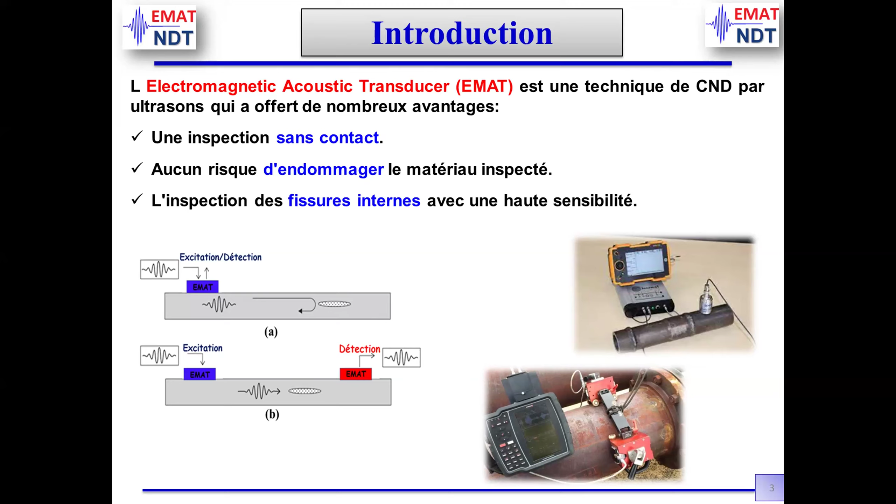The latest research on EMAT sensors focuses on detection and improving the efficiency of the sensor, but the quantification of defect size remains an issue that must be solved, and that is what we try to solve in this research by solving the inverse problem.

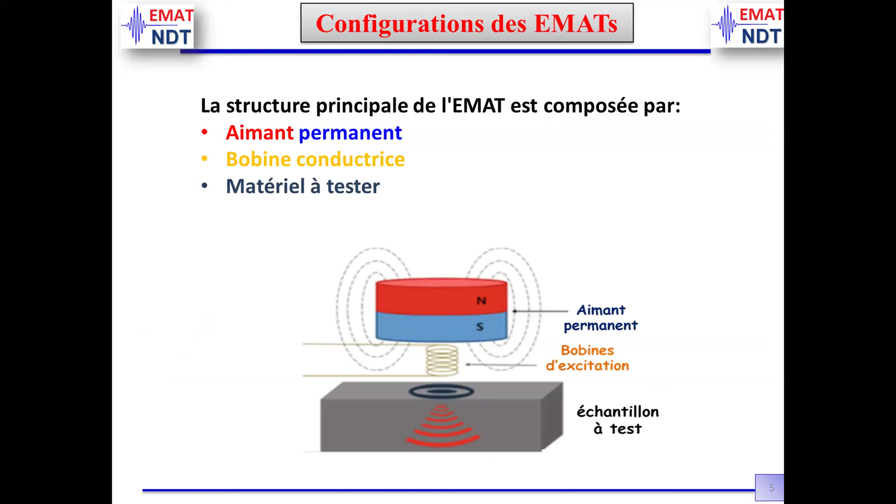For the sensor, the main configuration is composed of permanent magnets and a conductive coil placed above the material under test. The principle is the generation of the Lorentz force inside the conductive material. This force results from the interaction of the static magnetic field and the induced current at the surface of the material. This force introduces vibration, which means ultrasonic waves propagate in the material. We can receive and pick up these waves by the inverse of the electromagnetic model.

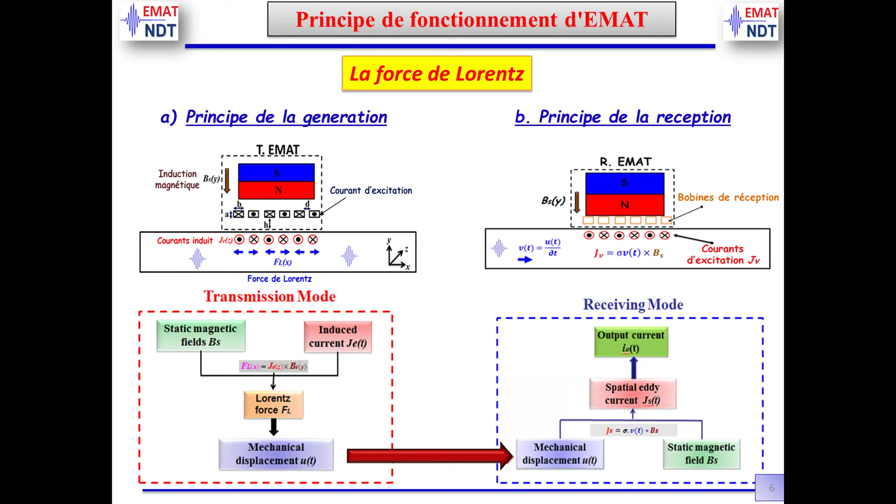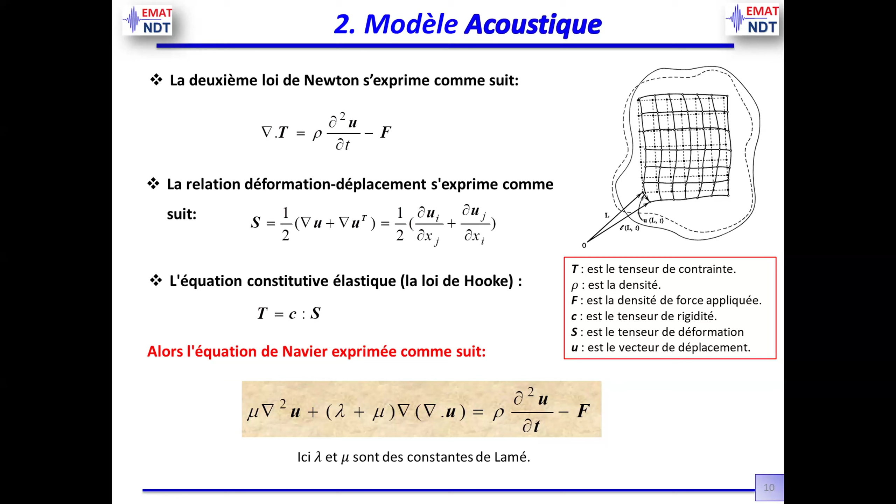The mathematical formulation is obtained from Maxwell's equations and the constitutive laws of the medium to form the partial differential equation, which is solved by the finite element method. For the acoustic model, we use Newton's laws and the relation between deformation and displacement to formulate the Navier equation, which is expressed by the following equation.

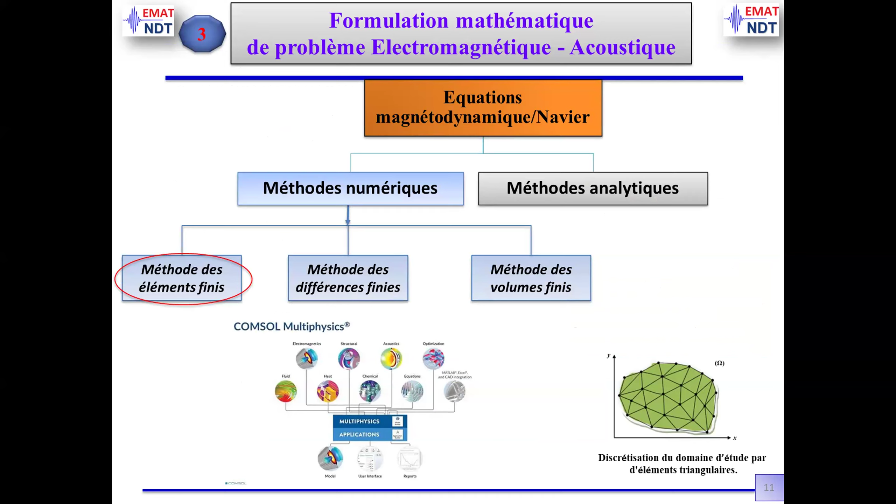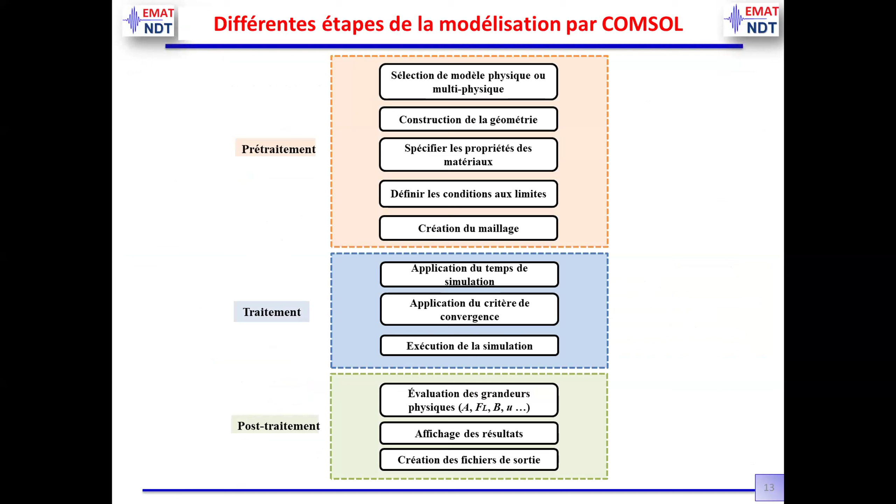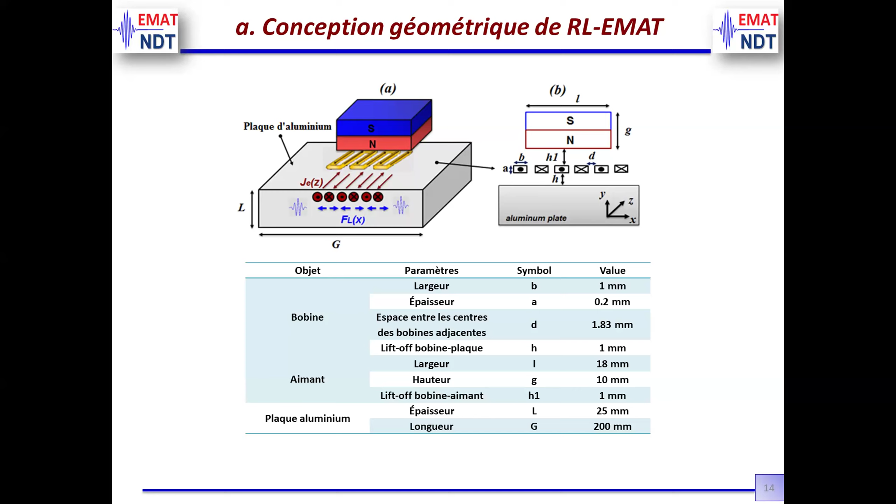To solve the preceding equations, we use the finite element method implemented in COMSOL Multiphysics. After the introduction of the geometry and the physical properties, we solved the problem to evaluate the potential vector and the ultrasonic field. This is the configuration that we used and implemented in COMSOL. It is the same for the transmitter and the receiver. We evaluate the following physical parameters: magnetic field and eddy current, Lorentz force, and mechanical displacement.

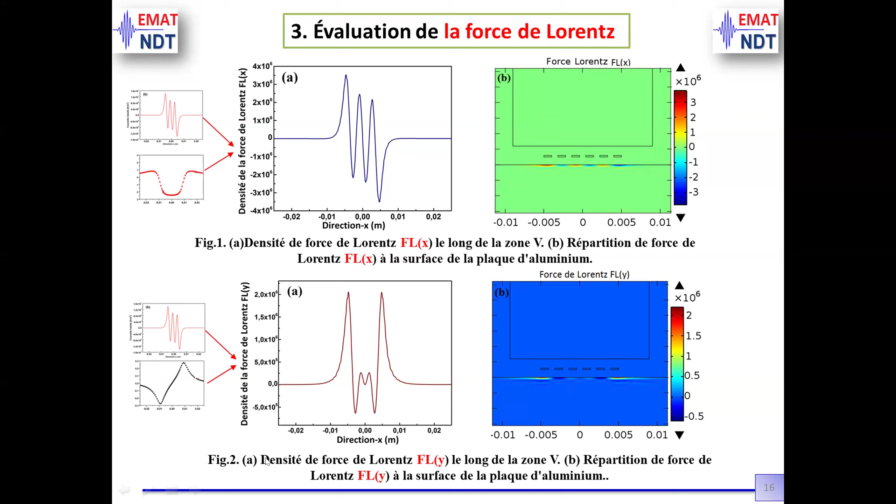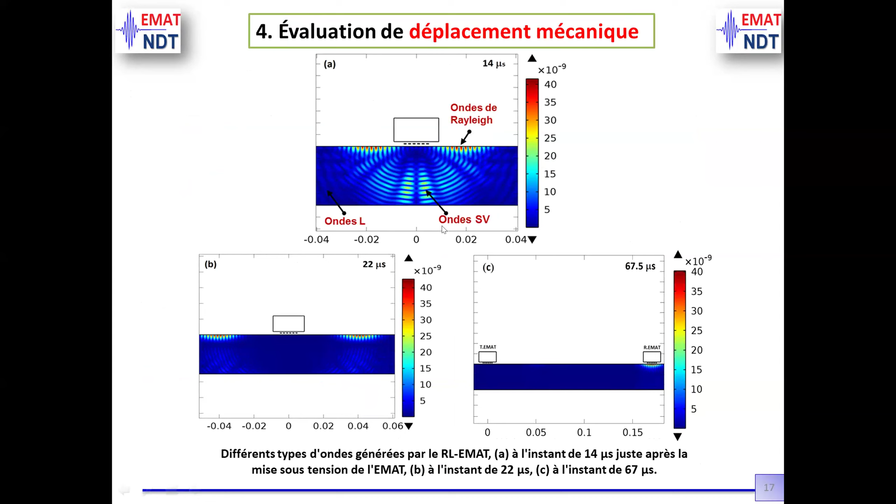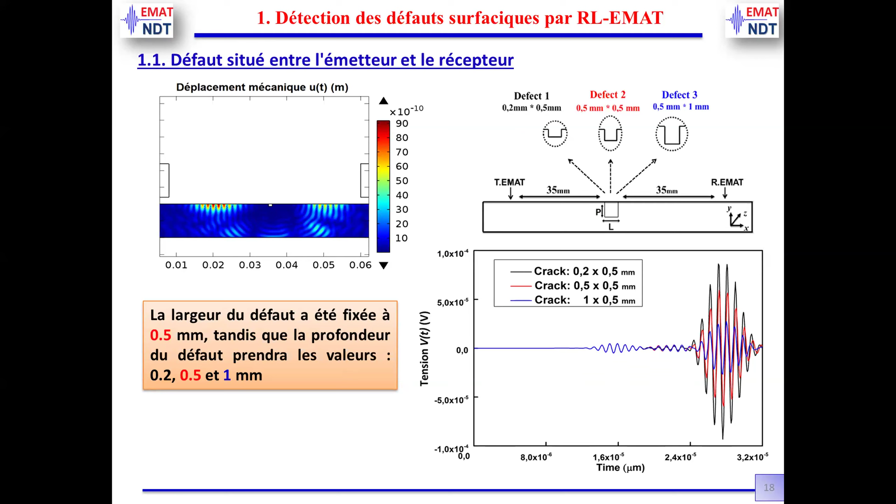This figure presents the Lorentz force generated at the surface of the material, which results from the interaction of the eddy current and the magnetic field in the x direction and the y direction of the geometry. This figure presents the ultrasonic waves. We can distinguish Rayleigh waves, shear vertical and longitudinal waves at different times. This result shows the efficiency of the EMAT sensor to detect variation in surface defects. This result will be used to solve the inverse problem from the received signal.

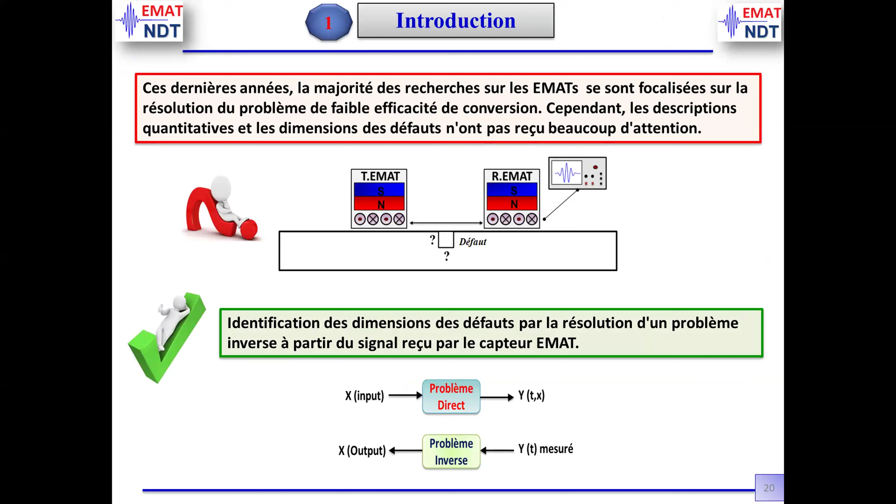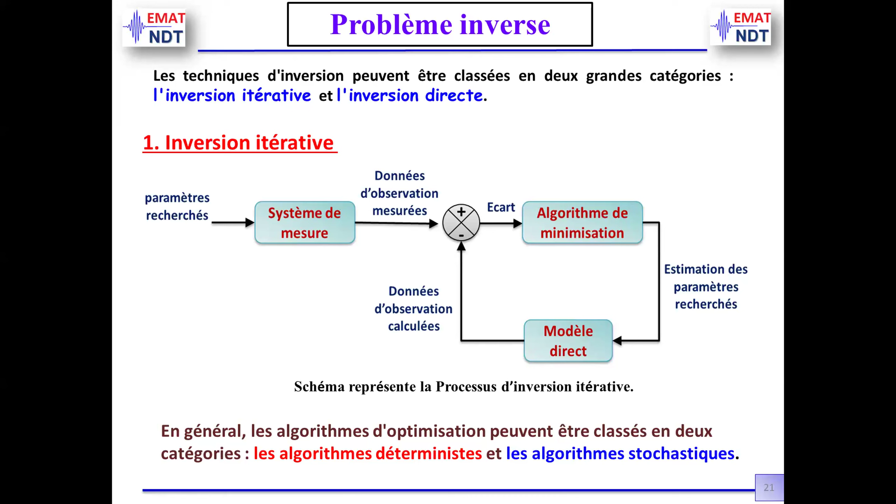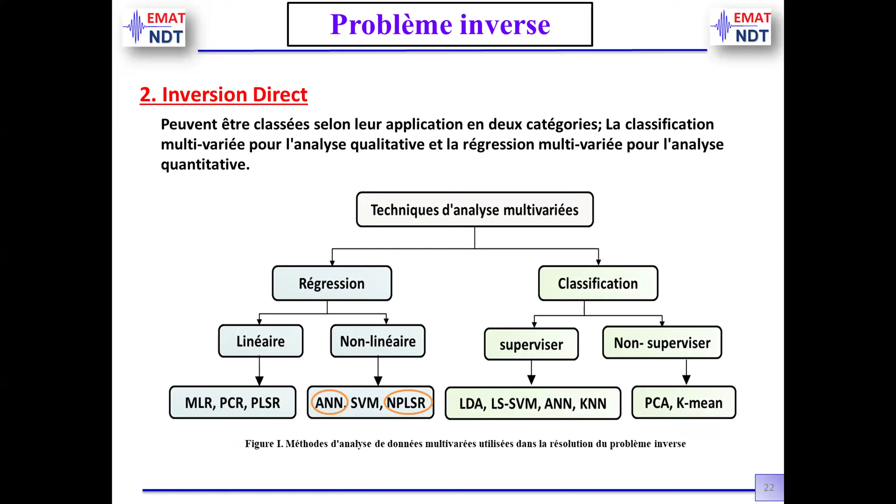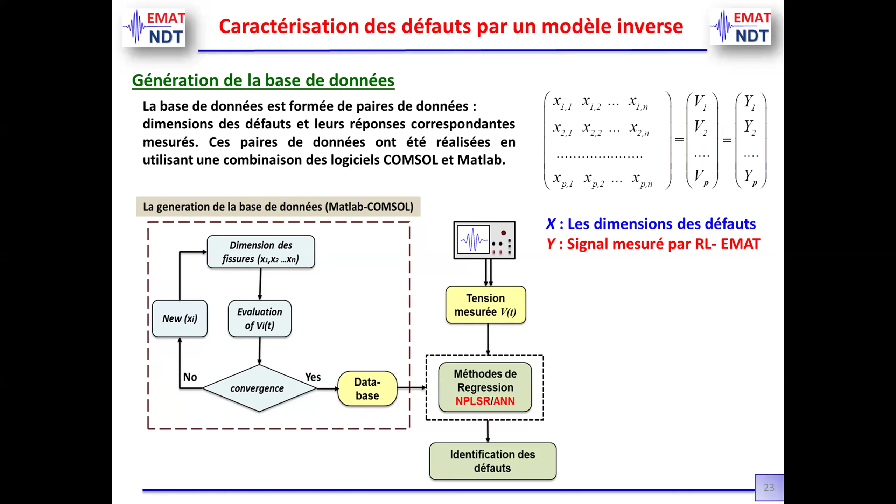Before starting the resolution of the inverse model, we need to build a database to feed the inverse model. It is created by numerically solving the direct problem. This database consists of two sets: the set of defects corresponding to each measured signal, and second, the voltage measured by the EMAT. This database is produced by combining two software packages, COMSOL Multiphysics and MATLAB. We need to evaluate some parameters to assess the efficiency of our inverse model.